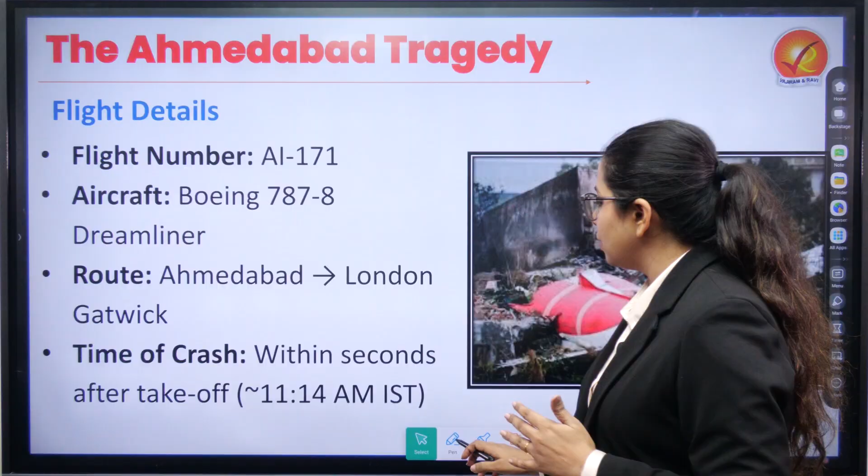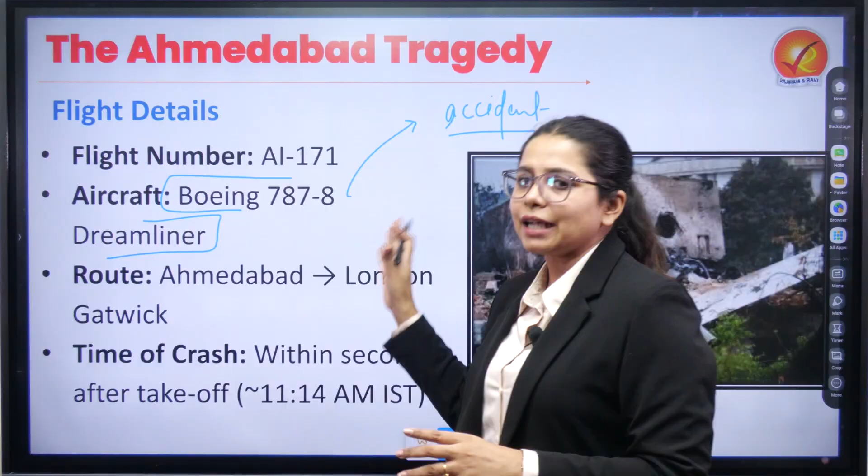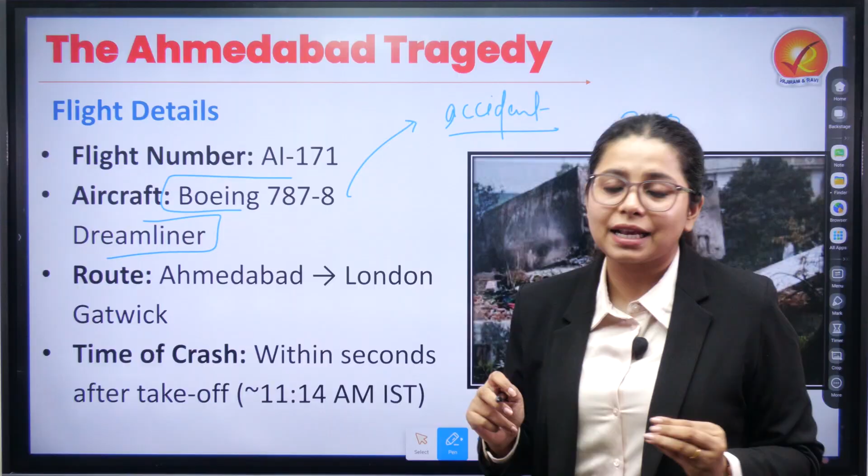So beginning with this particular accident itself, it happened last month and after almost a month this report has been released. It happened on the Boeing 787-8 Dreamliner, and when this accident took place, it not only took the lives of the people who were on board except one, but it crashed into a nearby site where the total count of deaths reached 260. Again reiterating my point, making it the deadliest aircraft accident in recent history.

Now that we know this particular incident, let us understand the investigation that has taken place. The investigation of this accident was taken up by the Aircraft Accident Investigation Bureau, and this agency was established in 2012 under the Ministry of Civil Aviation. It is their mandate to investigate aircraft incidents and understand the underlying cause. The idea is not to assign blame, but to understand what went wrong so that in the future that can be taken care of. So accordingly, they recommend systemic safety improvements based on global ICAO standards.

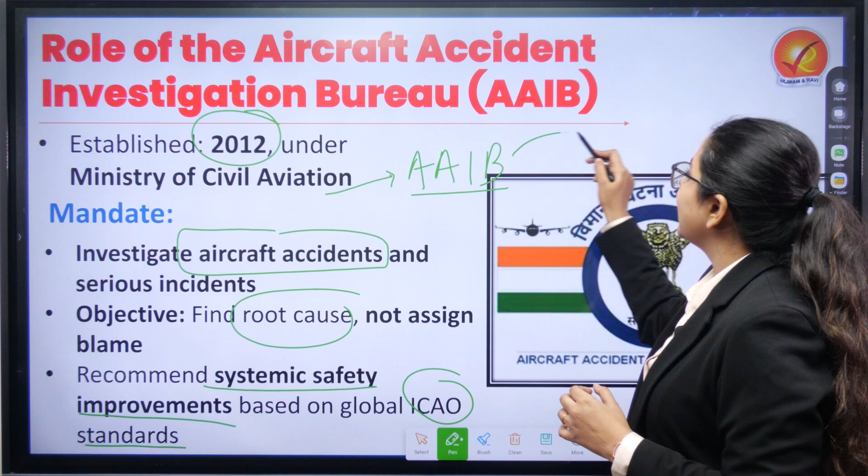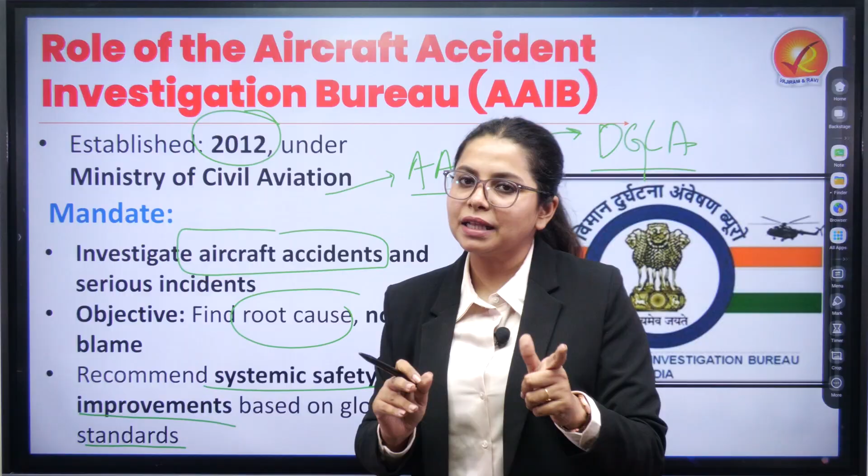Now, the idea of establishing this bureau was to take away the dual role of the DGCA. The DGCA was responsible for regulation and investigation also. So to take away the dual role and make it more focused, AAIB was established, and this investigation has been undertaken by this bureau itself. Now after a month, the preliminary report has come out and it is expected that a proper report will come out in the next 12 to 18 months.

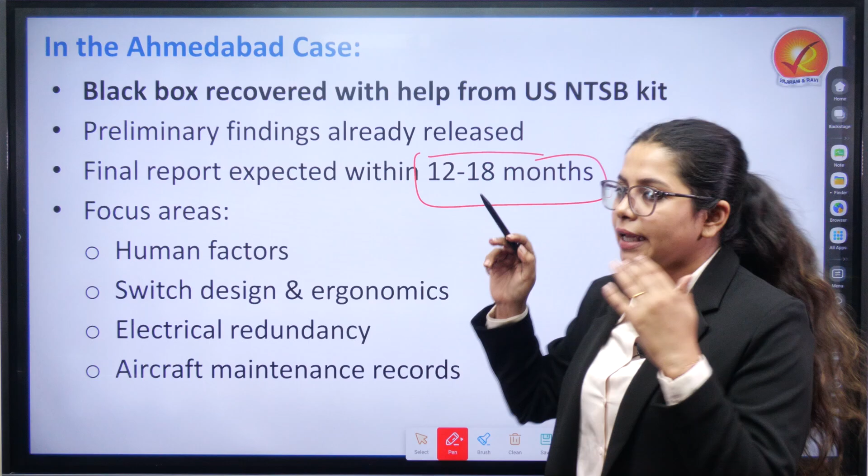Now, in the proceedings, we have also talked about the importance of the black box. You will understand when I mention the key takeaways how the black box has also helped to understand what unfolded, and the black box was later recovered after the accident.

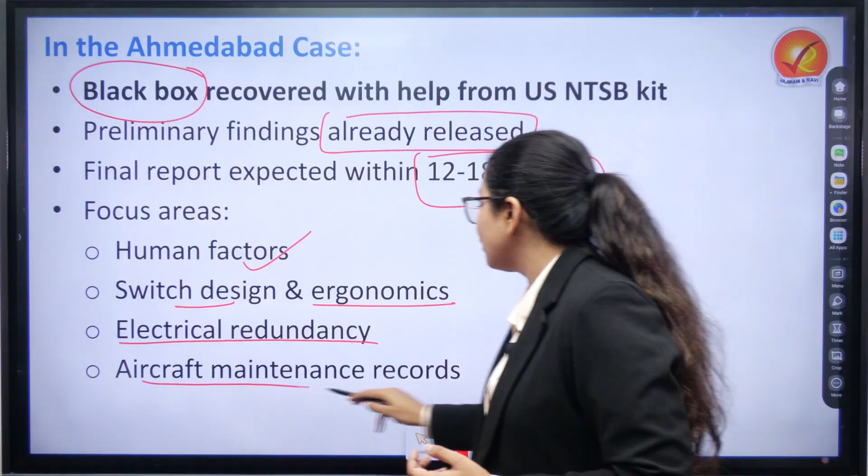Now the preliminary findings have been released and the focus areas have been the possibility of human error, the switch design, ergonomics, electrical redundancy, and aircraft maintenance records were also looked into. Now we will straight away move to the key findings that were seen in the preliminary report. So when we talk about this preliminary report, multiple findings have been seen.

The first and most important one to understand the cause of the accident was that it highlighted that both engines, N1 and N2, there were two engines on this aircraft, both lost their power within 15 seconds of takeoff. There is also an understanding from the black box recording that the pilots had a conversation: were you the one to cut off the fuel switch? The other one responded, I did not.

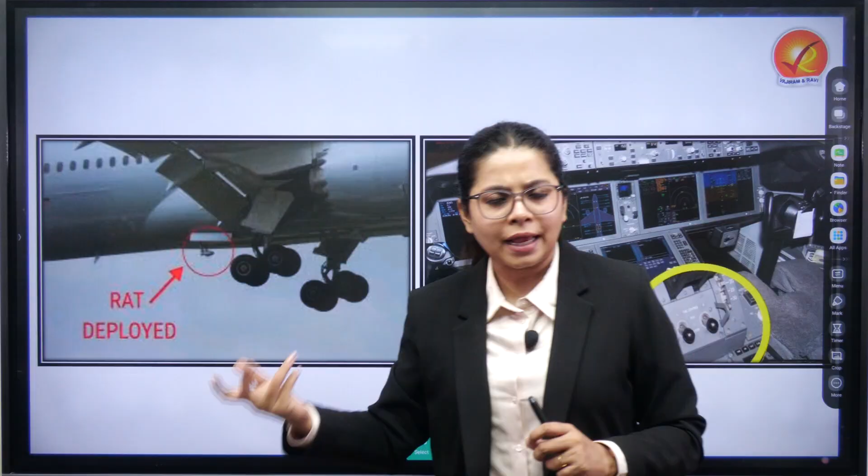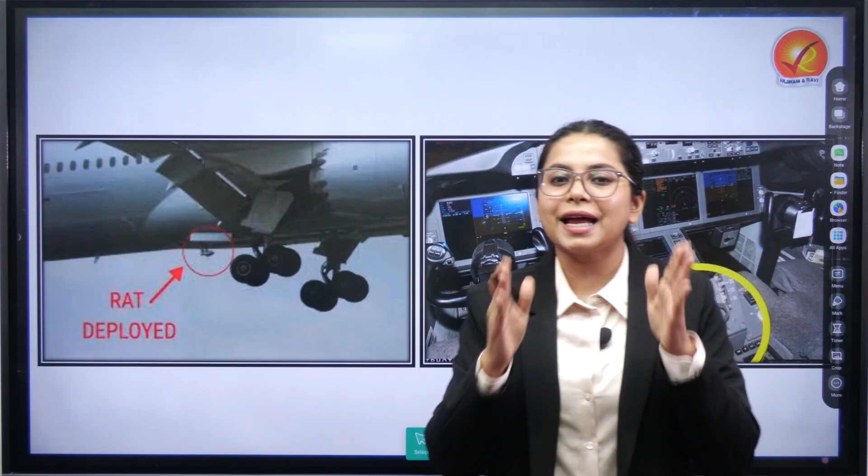Other than that, when we talk about RAT, it is basically a small propeller-like device which is used when engines are not working or shut down, so that it can give emergency hydraulic power. Now, it is through the CCTV footage that AAIB has confirmed that yes, RAT was also deployed. Now, we know three major things here, that the engines were shut down within 15 seconds.

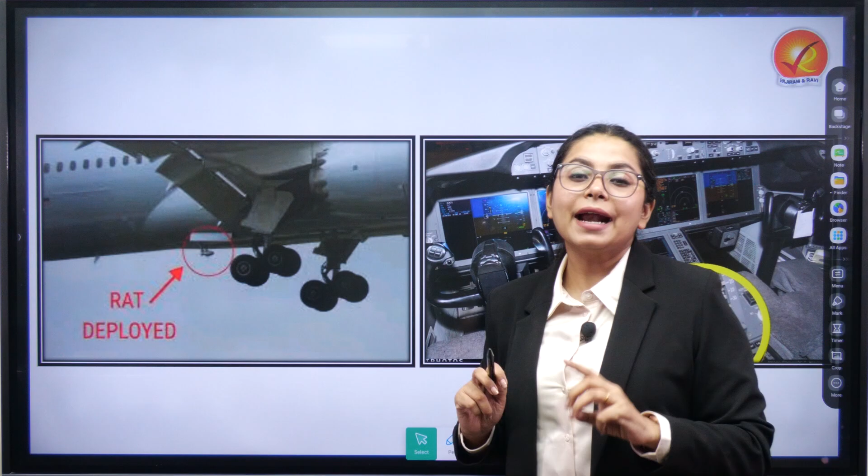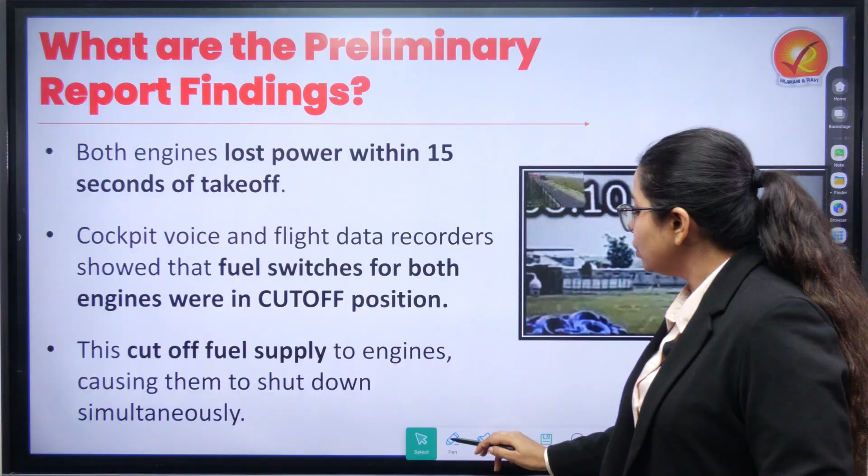Second, the fuel switch was moved from run to cut-off, and pilots are the ones who did not do it. It is seen from the cockpit voice recorder which was found in the black box itself. Now, the cockpit voice recorder and flight data recorder also show that the fuel switches for both engines were in cut-off position. Now, there are two positions for the fuel switches. One is run, the other one is cut-off.

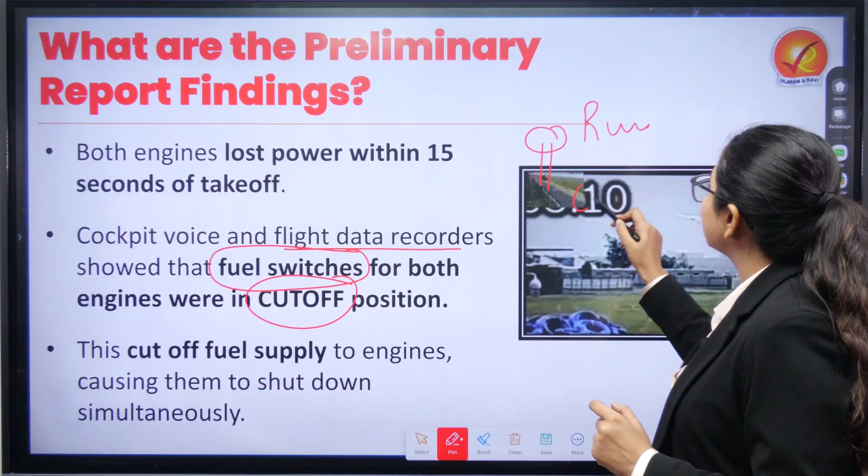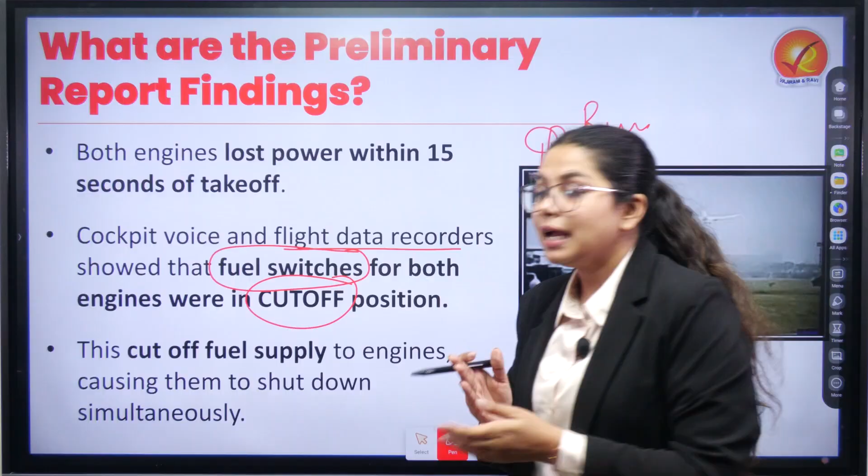So, we get to see that it was in the cut-off position, but from the voice recorder, we know that the pilots were not the ones who did that. And this cut-off of fuel supply to the engines was the reason that the engines had shut down within 15 seconds. So, that means the fuel engine switch was moved from run to cut-off, and that was the major reason.

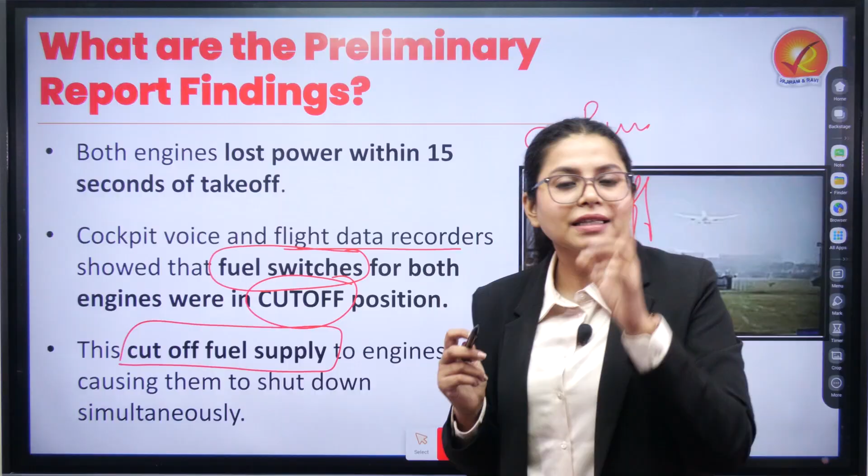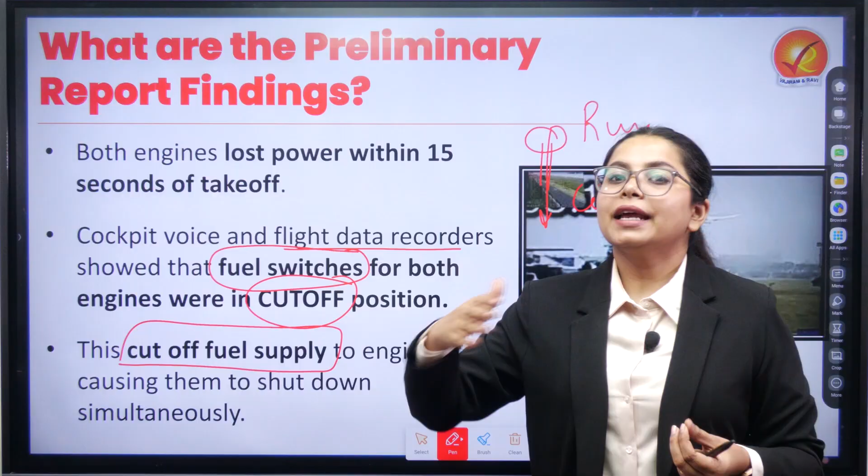Other than that, it was also found that re-ignition was tried, where engine 2 completely failed. The second engine could not revive, but engine 1 lightly revived but did not work. Now, these are the key findings that highlight the fact that there could be some reason; it could be human error also, where the pilots did not know what they were doing, but it did clear out the fact that both of the engines were not working and they were at a low elevation where it was not possible that they could have made a safe emergency landing as well.

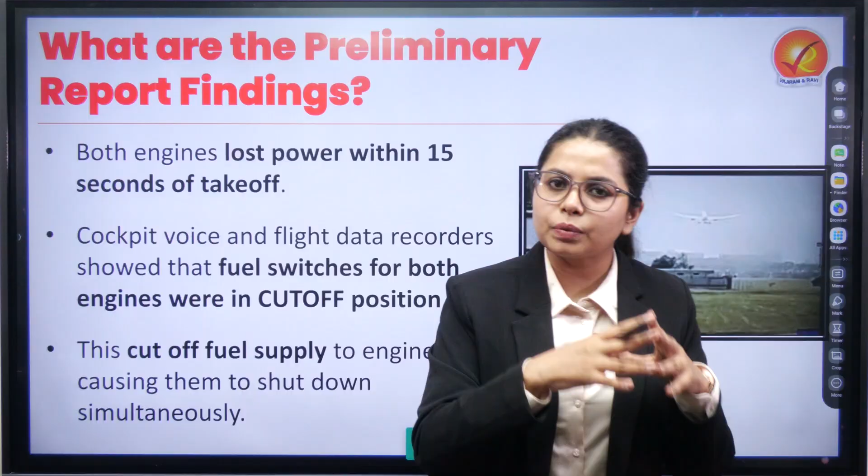Furthermore, there has also been a clear highlight in the report that there has been no sabotage activity, there was no weather issue, there was no bird activity because of which it could have taken place. The fuel has come out clean, so there was no sabotage associated with fuel. Other than that, the record of the pilots was also checked to make sure that they were properly rested, and their flying records have also come clean.

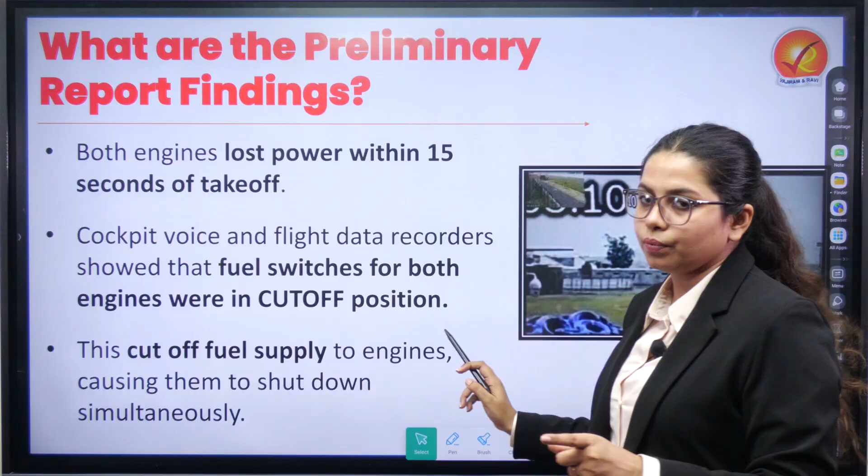So, the major understanding as of now is simple, that both of the engines had shut down and the fuel switches for both of the engines were in the cut-off position. Now, we will be trying to understand the fuel switch as well and how it works, but before that, let us look into why this situation, the fuel switch itself being in the cut-off position, is a problematic thing.

So, when we talk about this Boeing 787 series, basically all of these are twin engine aircraft, but they can safely fly on one engine, and failure of two engines at once suggests that it is a rare system failure or a mechanical fault or a human error.

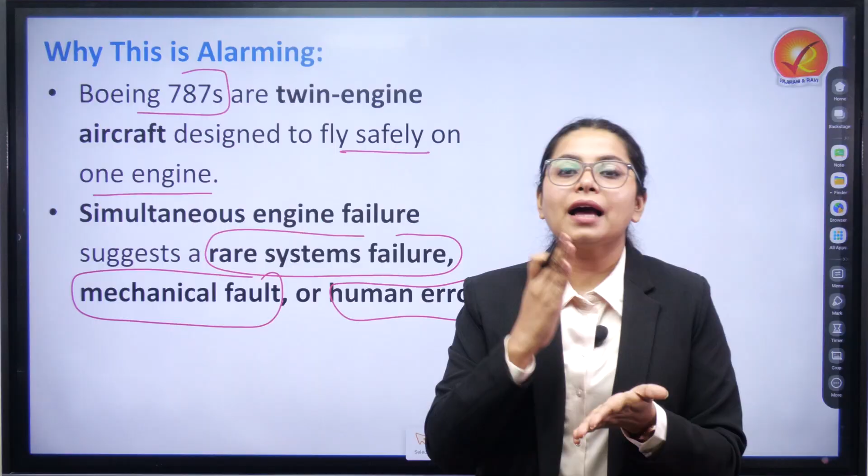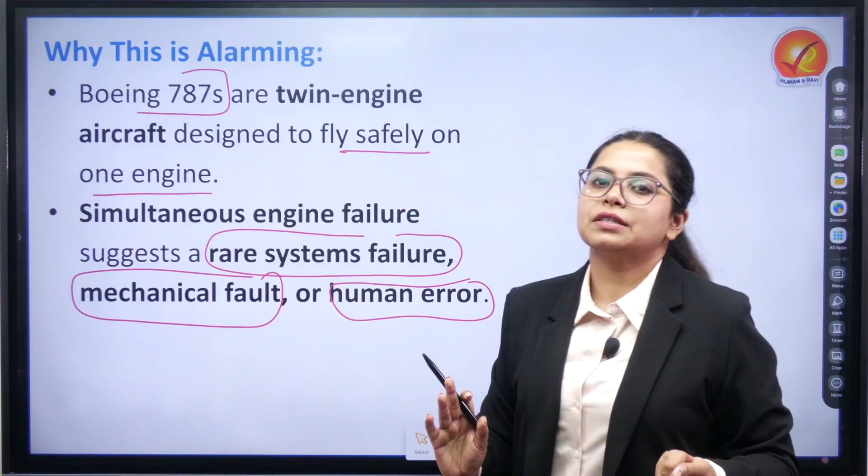Because if you get into reading the reports of recent accidents or otherwise also, you will clearly find that they are capable of running on a single engine, and that has been confirmed by experts and pilots, but both of the engines failing at once has clearly been highlighted in the preliminary report. That means this is a rare system failure. It could have been caused by a mechanical fault or a human error as well, that we have to see in the final report.

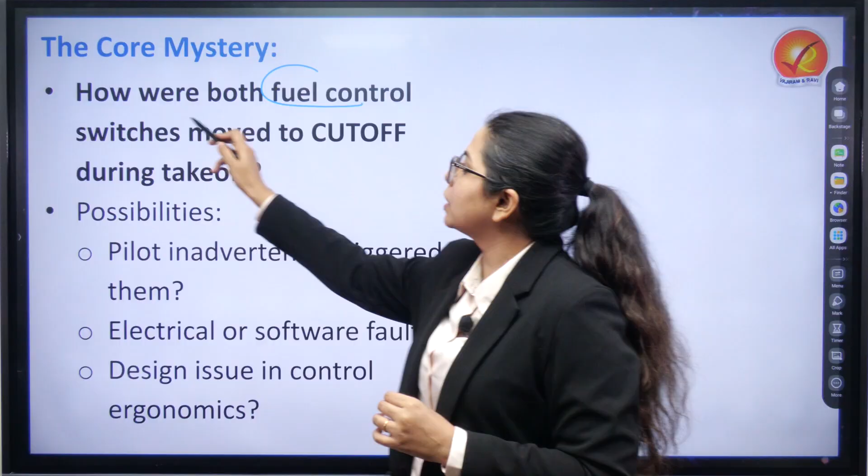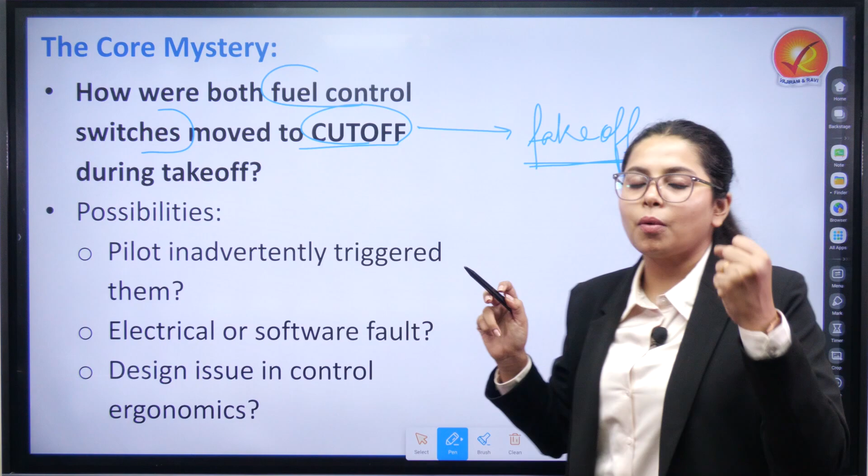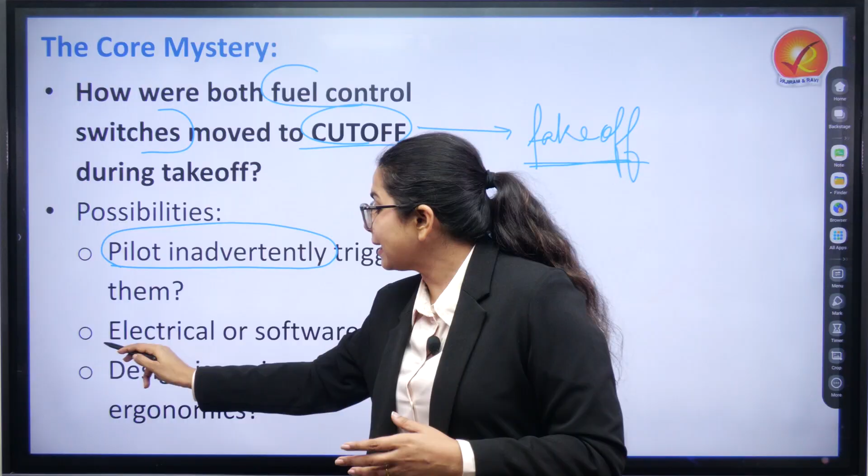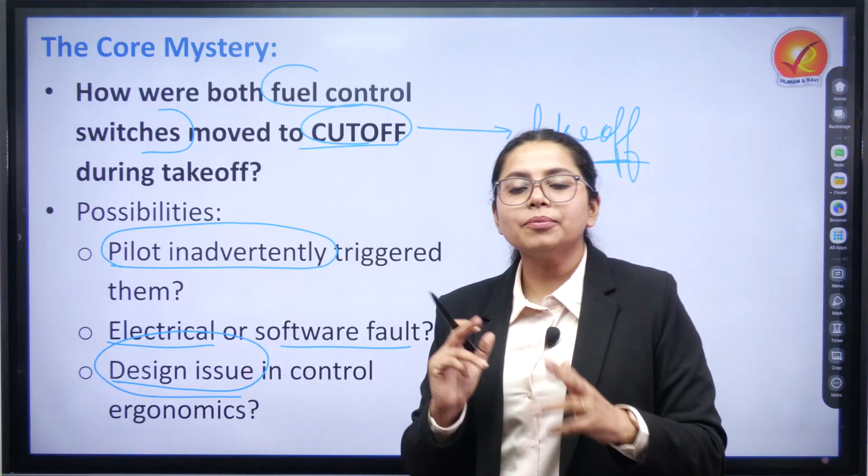Now, the core mystery that lies in front of us is how it was possible that both fuel control switches moved from the run position to the cut-off position during the important time when major force is required by the aircraft during takeoff, and there are multiple possibilities which have been suggested. For example, it is expected that either of the pilots might have inadvertently triggered it. However, an electrical or software fault is also expected, and there might be a design issue in the control ergonomics which were present there. Now, these are the possibilities, and that would be understood only in the coming time.

But here comes an important question for us, that we have to understand what exactly a fuel control switch is. When we talk about the fuel control switch, we have to remember that it is a manual switch which controls the fuel flow to the engine, right? So, if the fuel is moving towards the engine and it has to be shut off, it can be done by this manual switch. If it has to be reconnected, then it can be done by the same switch.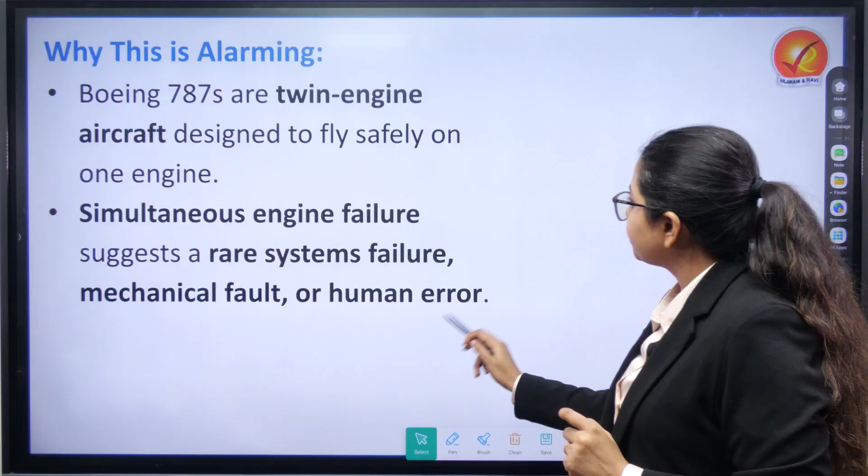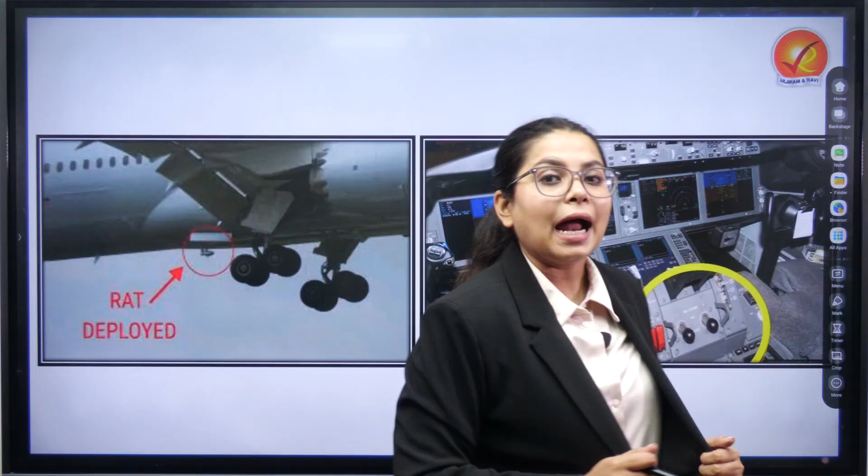Now, it is located at the center pedestal. That means it is a switch that is between the two pilots. If this is the pedestal, it is lying at the center between both pilots, just behind the throttle levers which are present. So, if we have to understand where it is located, we can see it on the image right here. So, these are the positions of the pilots; just below the throttle lever, these fuel switches are located, and they are responsible for the movement of fuel to the engine.

So, if it has to be done, it will be in the run position, and it is moved to the cut-off position only when the landing has been safely done. Now, because we have two engines in this particular aircraft series, both engines have their individual dedicated switch. That means one switch for one engine and one switch for another.

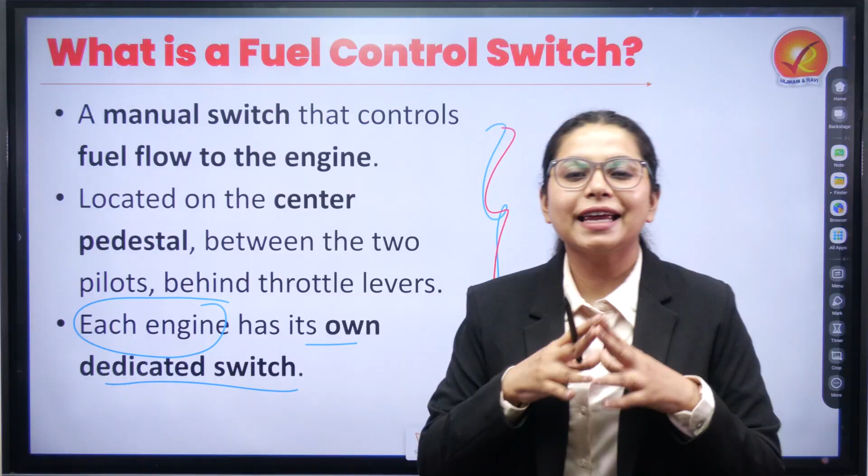That means there couldn't have been a possibility where both of the engines were shut off at once. Now, if we talk about the fuel switch itself, it clearly highlights its significance because it facilitates the supply of fuel to the engine, and if the engine is not working or has shut down, then the aircraft is definitely in an emergency situation.

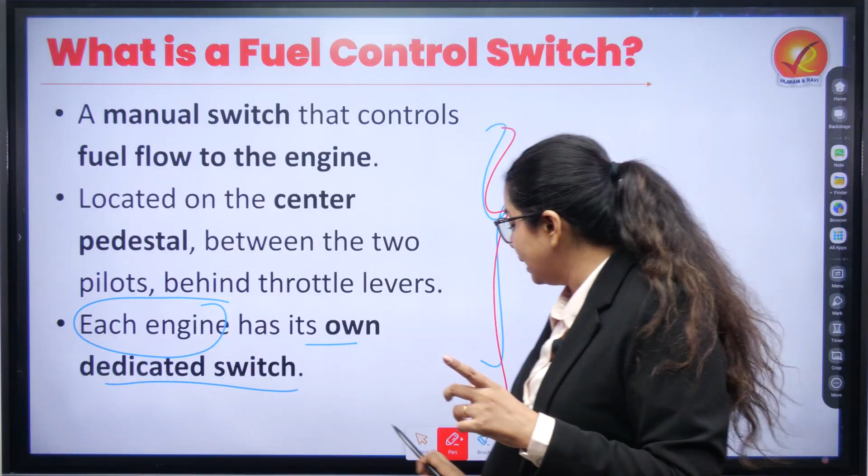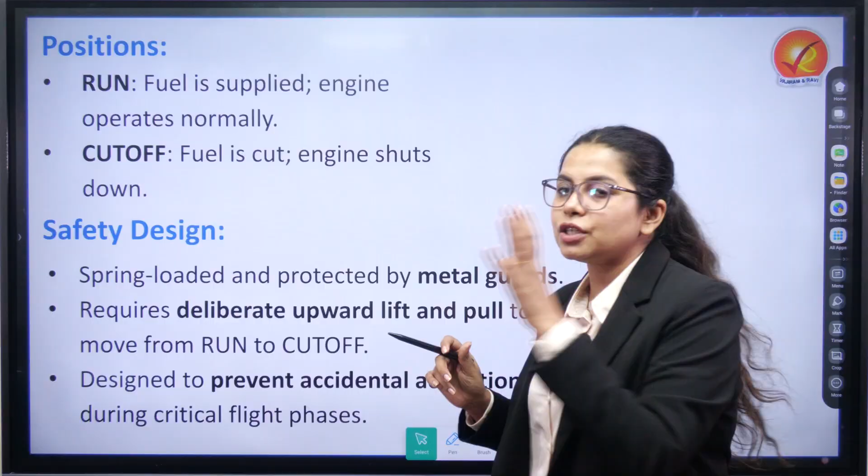Now, what exactly are the positions of the fuel switch? There are two very simple positions. First is the run position, when the fuel is being supplied to the engine and it helps in operating the engine normally. The other position is the cut-off position. It is when fuel is cut and the engine is shut down.

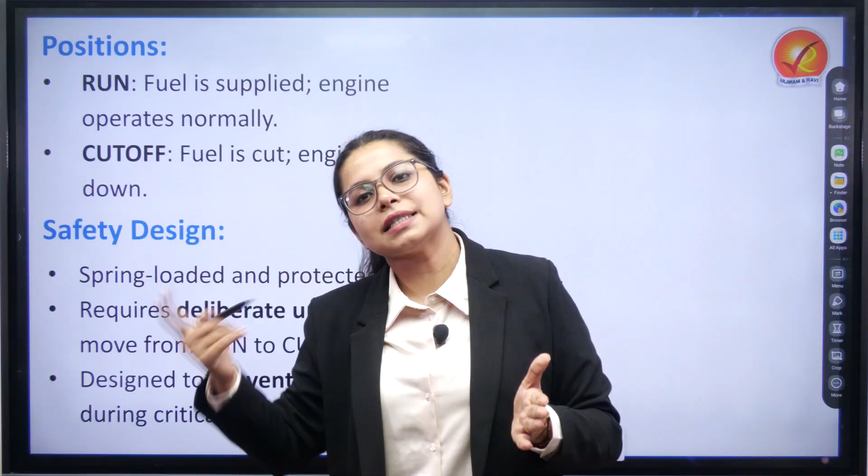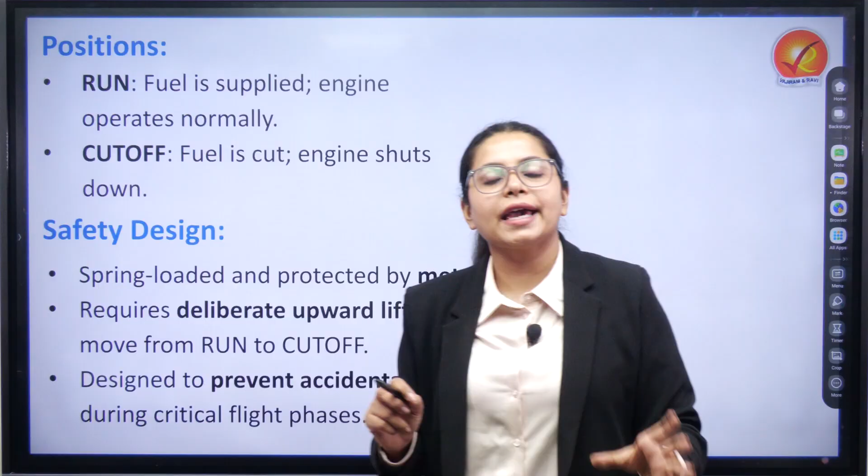Now, why would we want the engine to shut down? Because there have been multiple cases of engine fire. In such a situation, we do not want that fire to be fueled, so we cut off the fuel supply to the engine in which there is fire. Then the aircraft can move on the singular engine as well, which we have understood specifically for this particular design. We have twin engines, it can work on a single engine, and if one engine has caught fire, the airplane can easily run on the second engine.

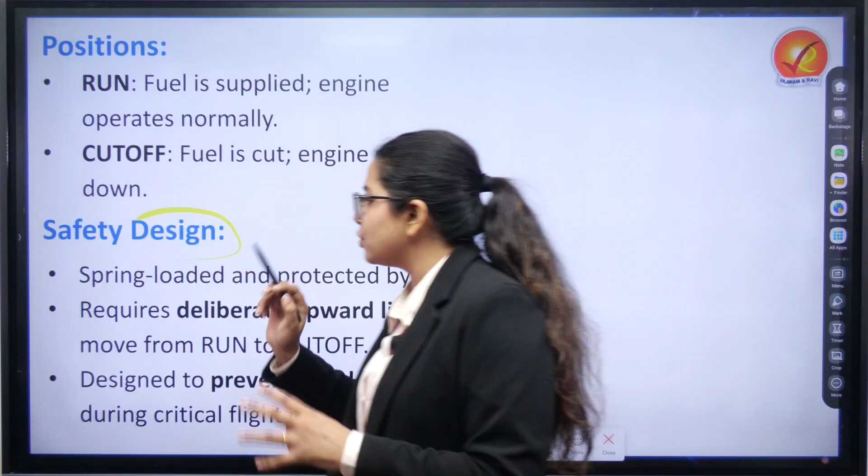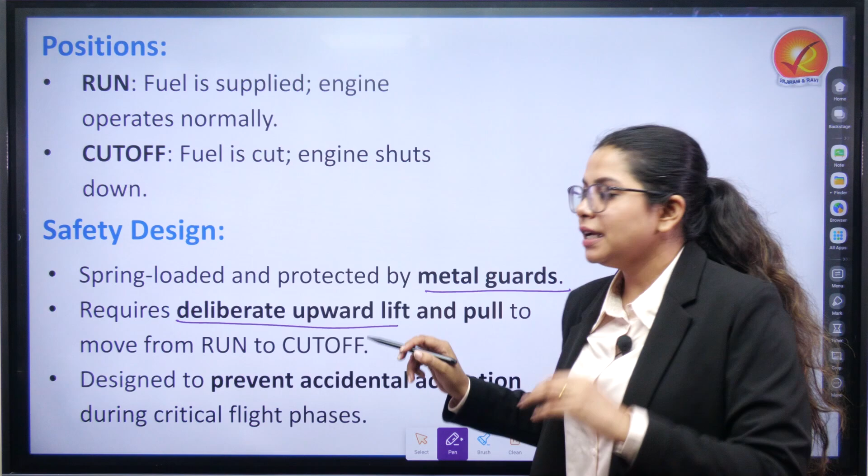Now, this is the very simple basic reason for which we see the fuel switch cut off usually in airplanes. Now, it has been made with certain safety designs as well, meaning it is spring loaded and is also protected by proper metal guards. It requires proper deliberate upward lift, meaning it cannot be triggered randomly, and it has a proper upward lift and pull movement.

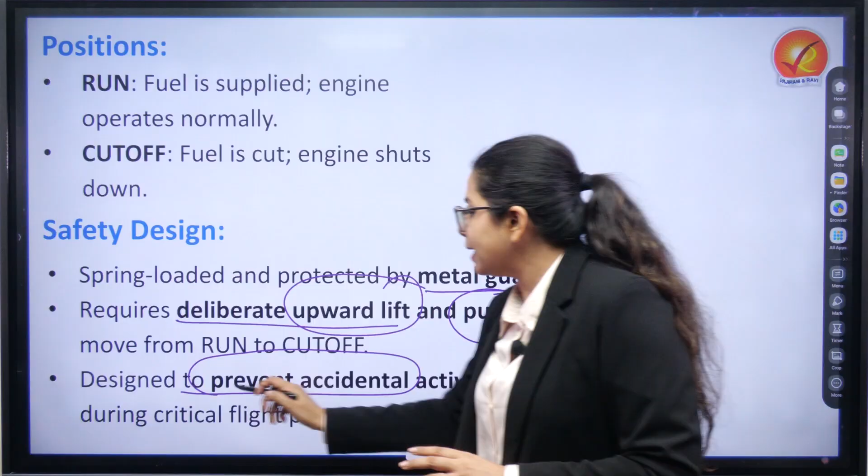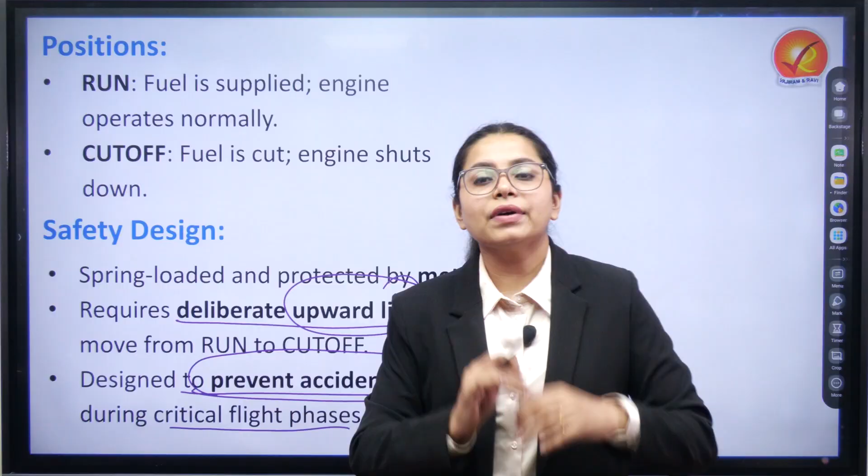Other than that, it has been designed to prevent accidental activation during critical flight phases. If we talk about critical flight phases such as landing and takeoff, that is the time when there is maximum workload, not just on the aircraft but on the pilot as well, and we do not want accidental activation, meaning moving of the switch from run to cut off. So, it has been designed in such a way to prevent that.

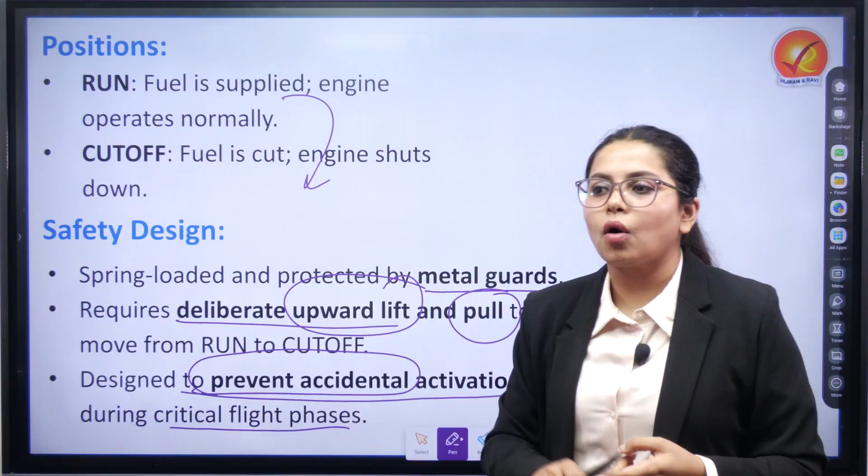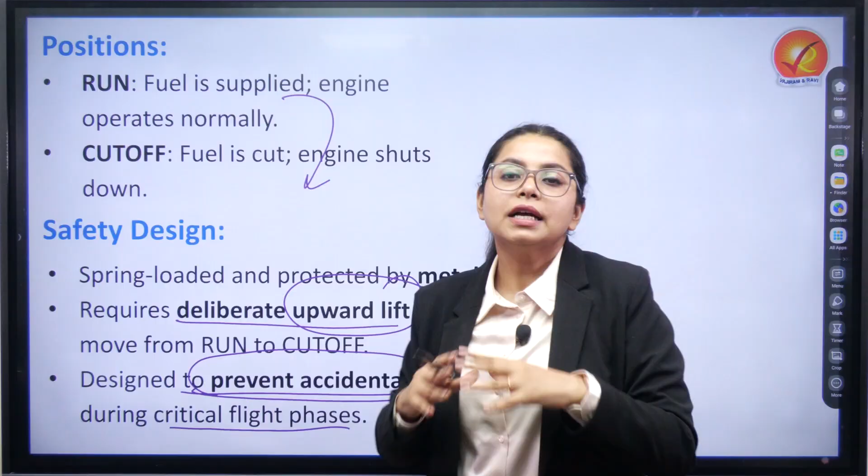But then again, we see that it happened, and both of the fuel switches were cut off, because of which the thrust was lost in the airplane, and gradually within seconds it crashed, because it was at such low altitude that there was no scope for safe landing, emergency safe landing at all.

Now, this basically tells us the exact problem that is in front of us. That means if both switches were in the cut-off position, that means automatically complete engine shut-off had taken place. Even though there were trials of reconnection, that only happened for engine 1, and that also failed later.

So there was complete engine shutdown that was seen, because of which there was loss of thrust and the electrical power that was present. So even RAT could not help. When we talk about ram air turbine, it could not help. And whenever such things happen at low altitude, there is definitely a risk of crash, which seems to have happened in the Air India crash we are talking about.

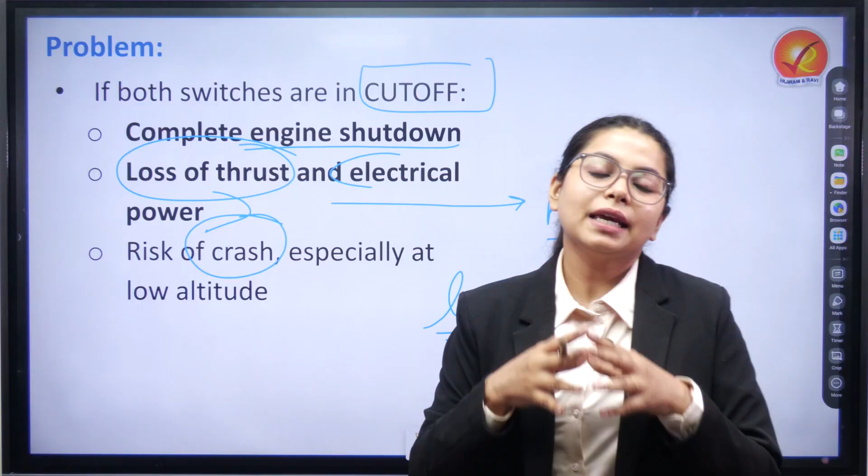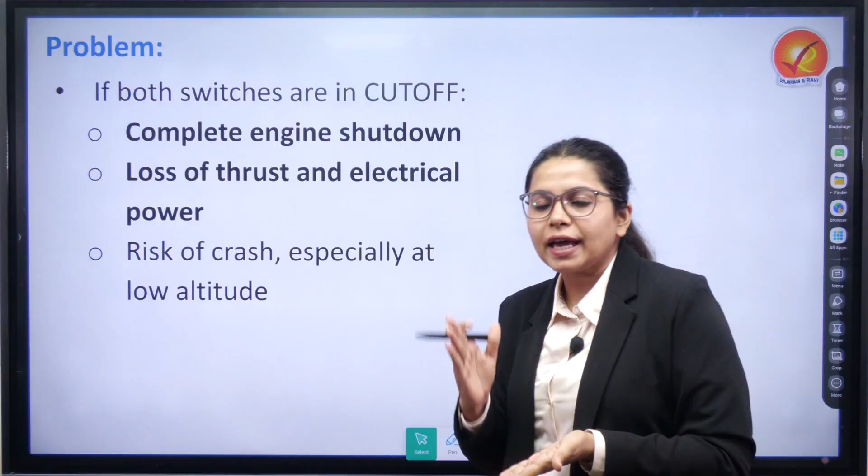Now, this preliminary report opens a plethora of possible failures in a specific domain, where the possibility of failure of both engines simultaneously highlights that it could be an accidental pilot error, because it was definitely not a conscious one. We know it from the cockpit voice recorder.

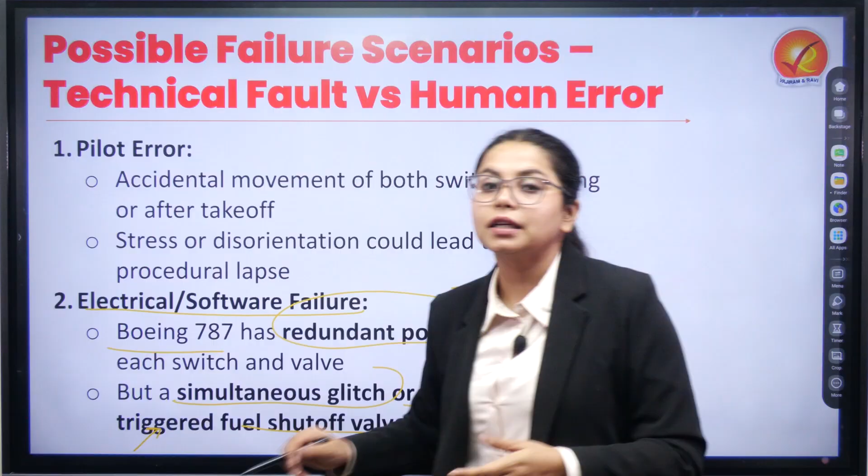Other than that, it could have been an electrical or software failure, because the Boeing 787 has redundant power circuits for each switch and each valve, and a simultaneous glitch or any type of short happening there could have triggered fuel shut-off valves. That means in an emergency situation, when fuel shut-off valves are triggered, any glitch could have triggered that particular shut-off. Other than that, we are also looking at design vulnerability, meaning there was too much manual control, especially over a critical safety function, and there was no inbuilt override system to prevent dual engine cutoff, especially during mid-flight.

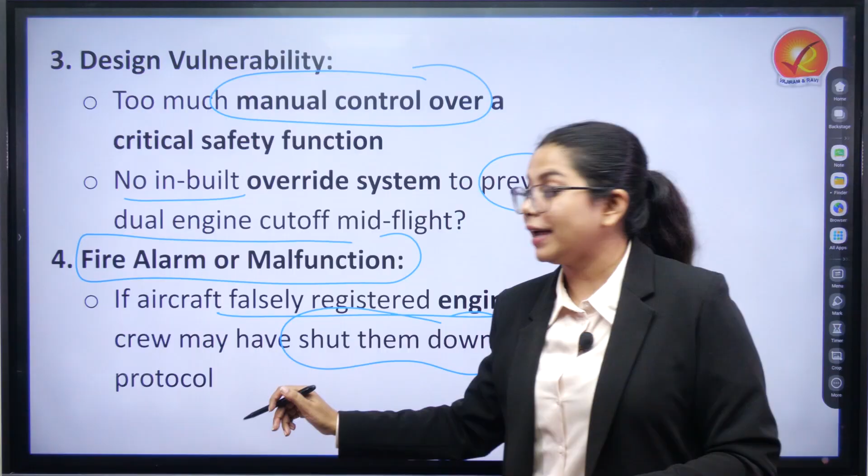And the final possibility seems to be a fire alarm or malfunction, meaning if there was a falsely registered engine fire, the crew may have thought it was important for them to cut off the fuel switch and move it to that particular position to save the aircraft from fire, as per the protocol itself.

Now, the final report, which comes in the next 12 to 18 months, will be able to give us the answers. But that was all for now. Thank you so much.